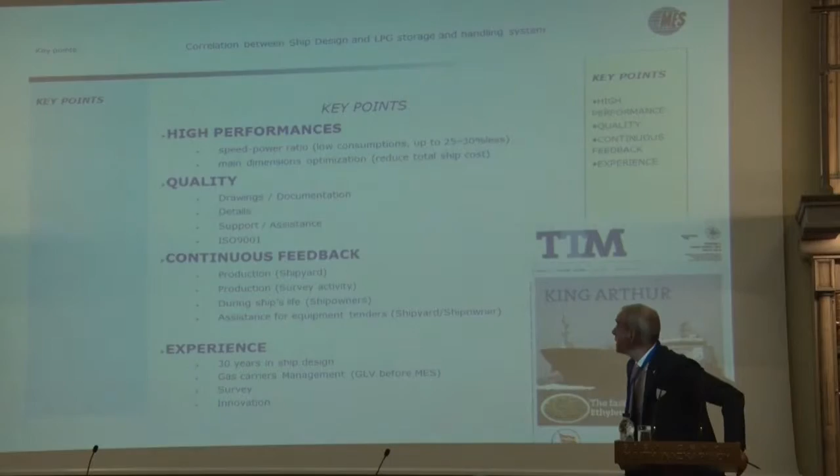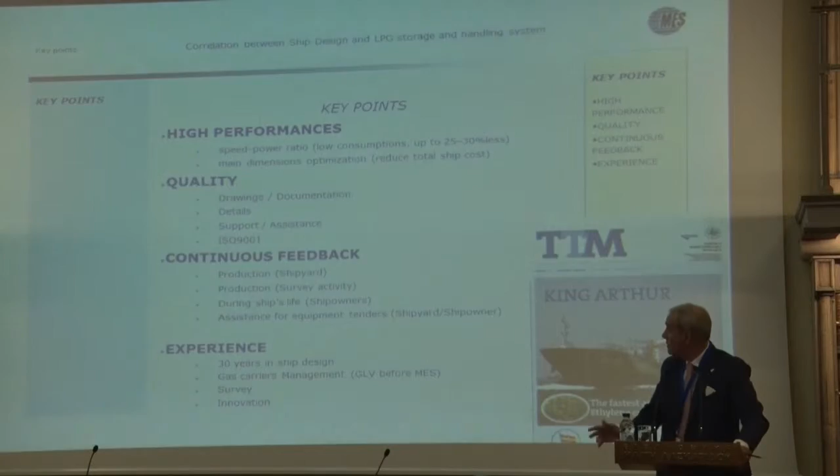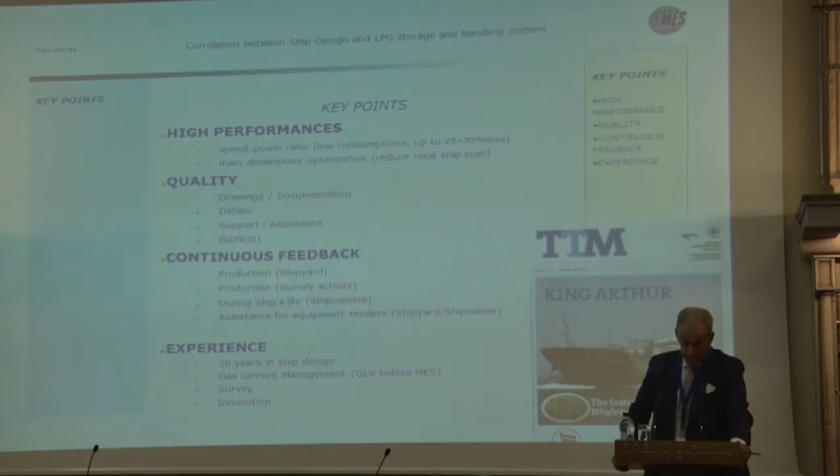Key points: we are very much focused on high performance, and we work very hard on the lines. We will see then how we do. The quality, and we can base our work on continuous feedback from either shipyards, our site team, and also from ship owners, our clients.

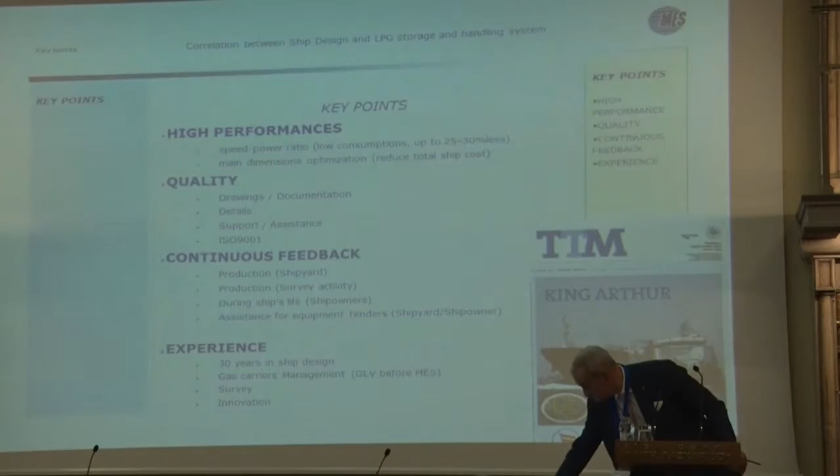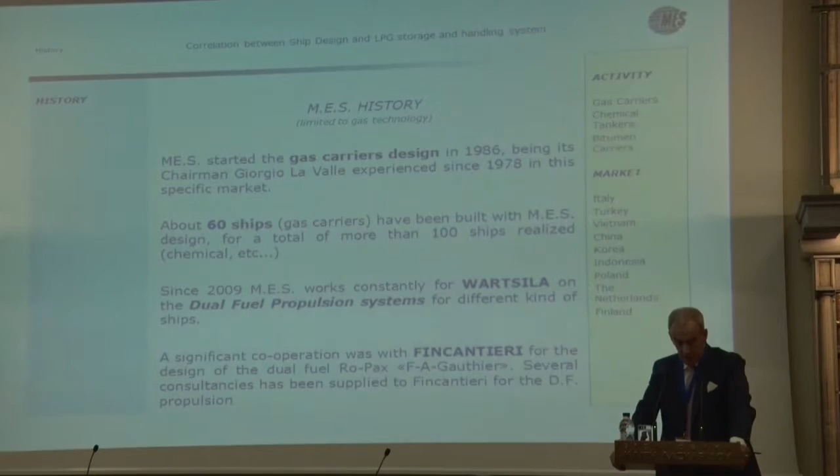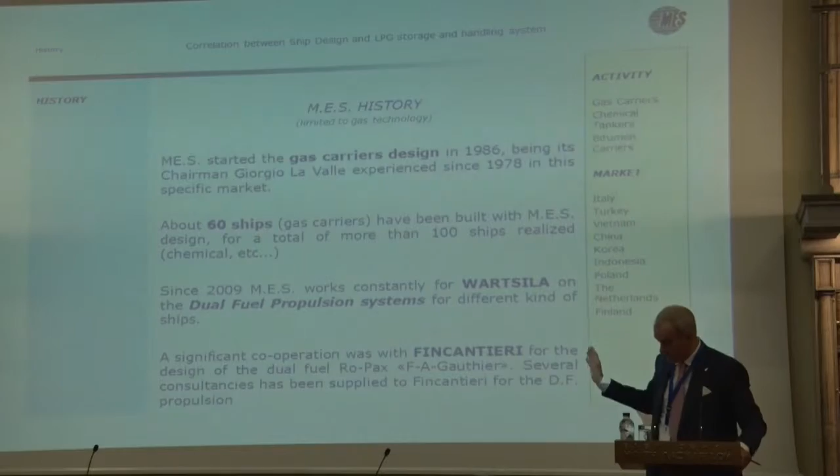We have about 100 ships sailing that we have designed. Out of them, 60 are gas carriers. We are also subcontractor of Wärtsilä for some projects in LNG at the moment.

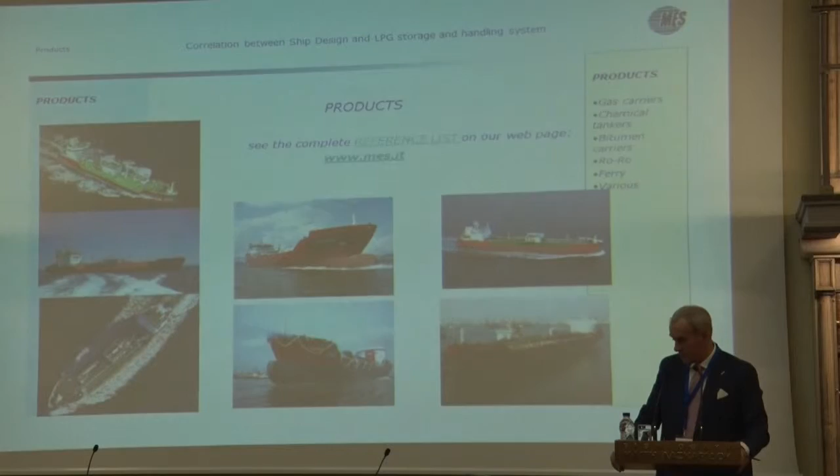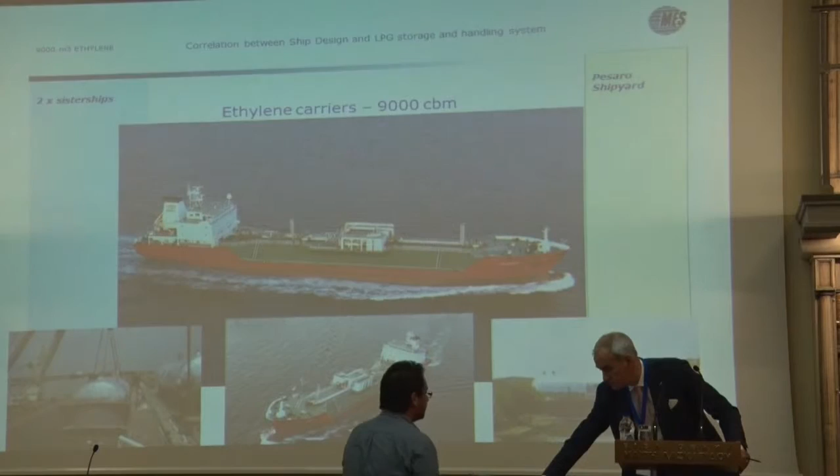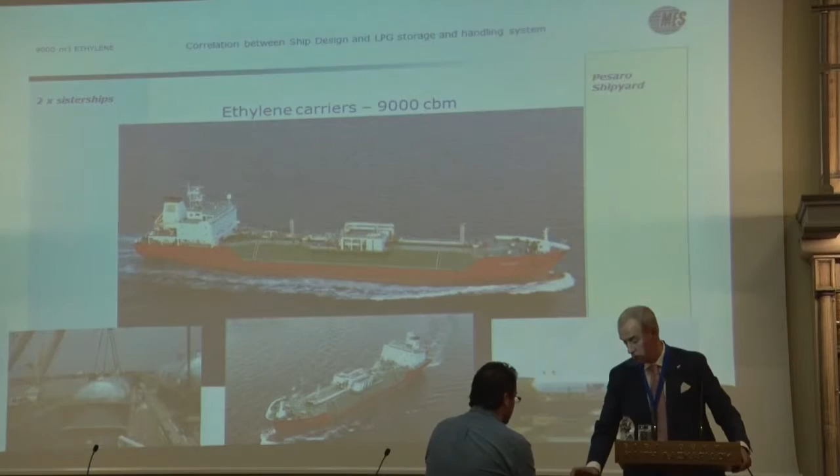This is some examples of our design, ships from 3,000 up to 40,000 cubic meters. This is a series of 9,000 cubic meter ethylene carriers we built, two in Italy, one in Poland, and one in Turkey, with cylindrical tanks.

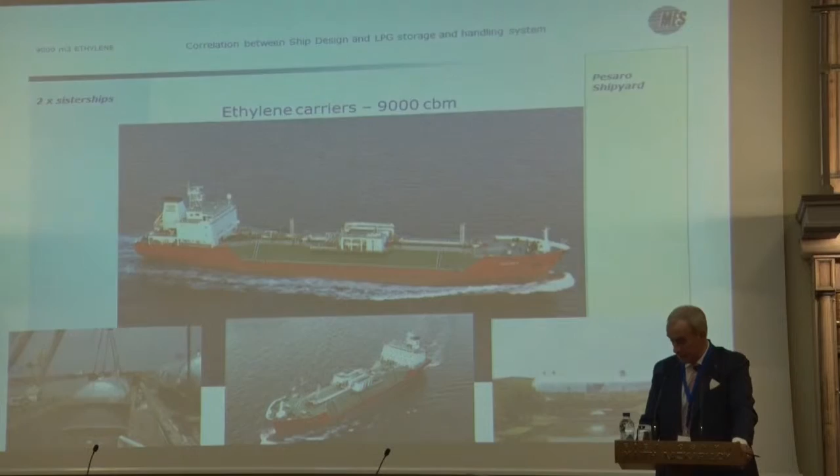The last one is a very interesting project with the twin screw, twin skeg solution. We obtained really very, very good performance with this vessel, just slightly less than a single propeller. That is really very good results.

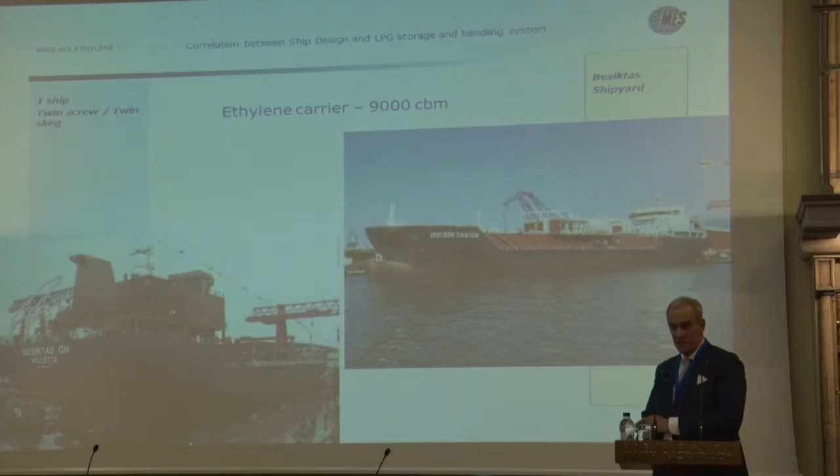Taking into consideration that we have redundancy here and also flexibility - not with this ship but with a chemical carrier - because of the very poor time charter, very poor market, the ship owner decided to run with just one propeller. Some days with one, and some days with the other one.

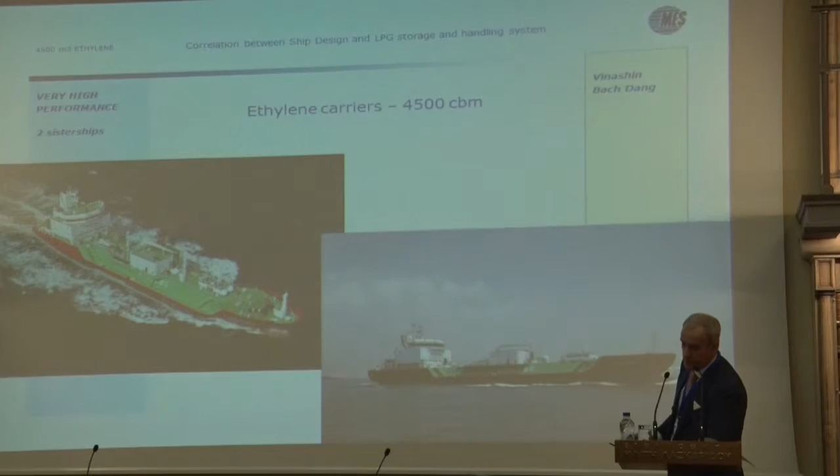This is a series of ethylene carriers, 4,500, we built in Vietnam, with a very high speed, 15.8 knots. That was a ship owner request. These are some details of the same ship.

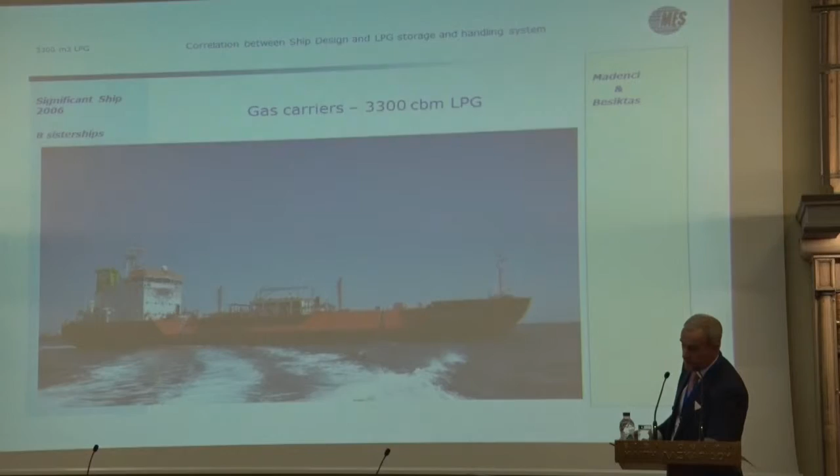Also a series of 8 ships, 3,300, built in Turkey, also very performant. Example of that layout.

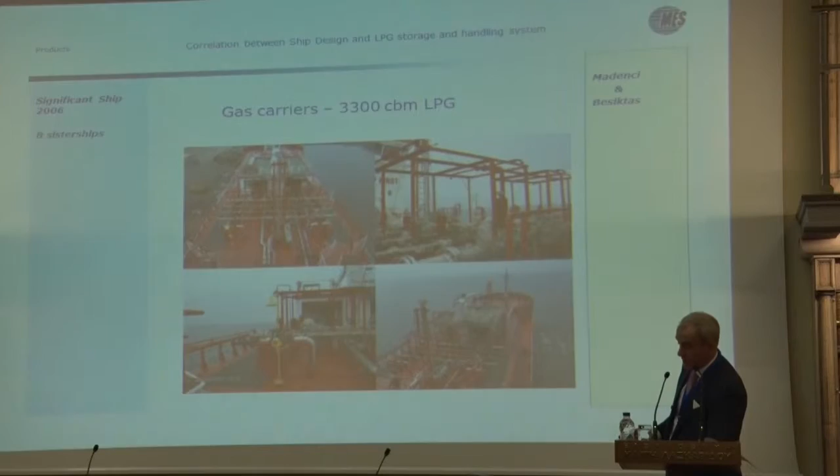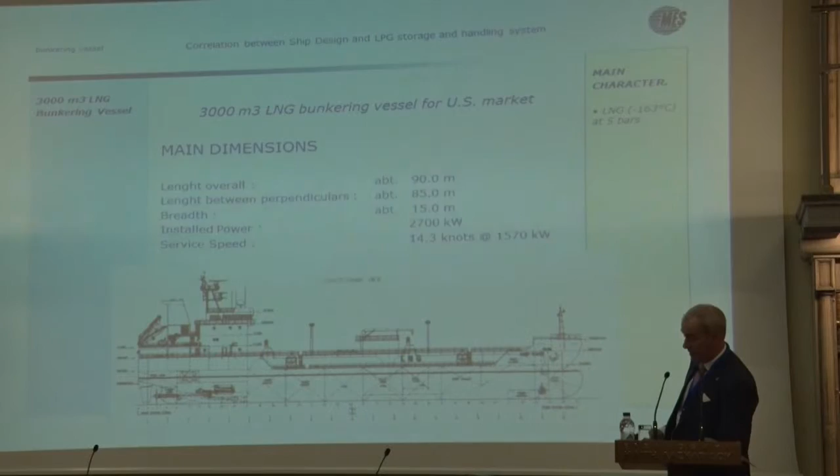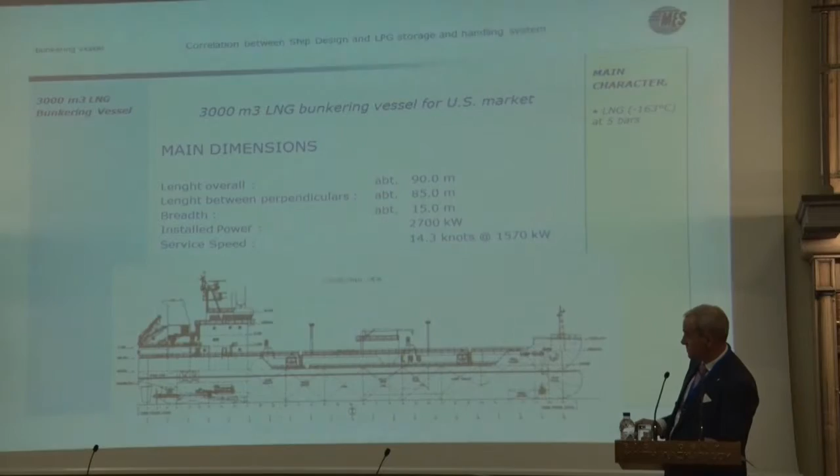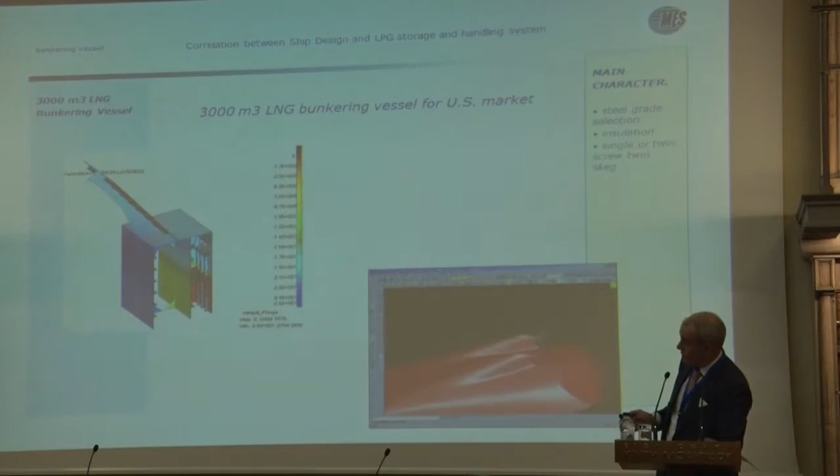Also in the last years we are active in LNG small-scale carriers and also LNG propulsion. We are cooperating with major players, of course not doing anything ourselves, just as subcontractors. Example of FEM thermal calculation to determine the temperature around the hull and therefore the steel grades necessary.

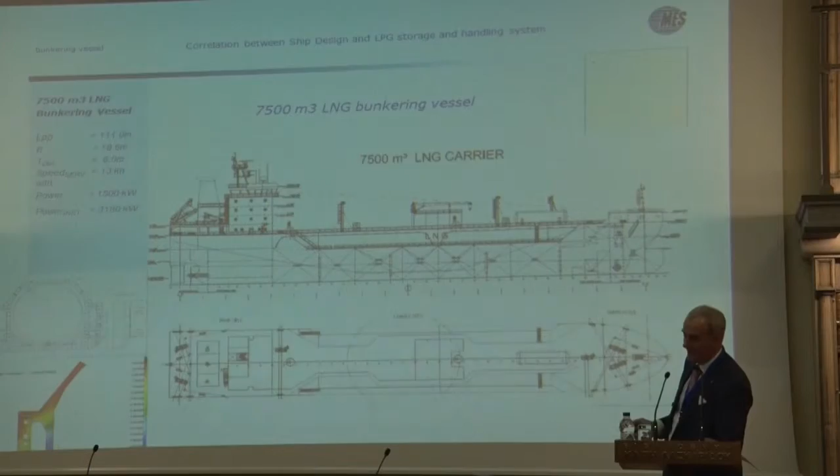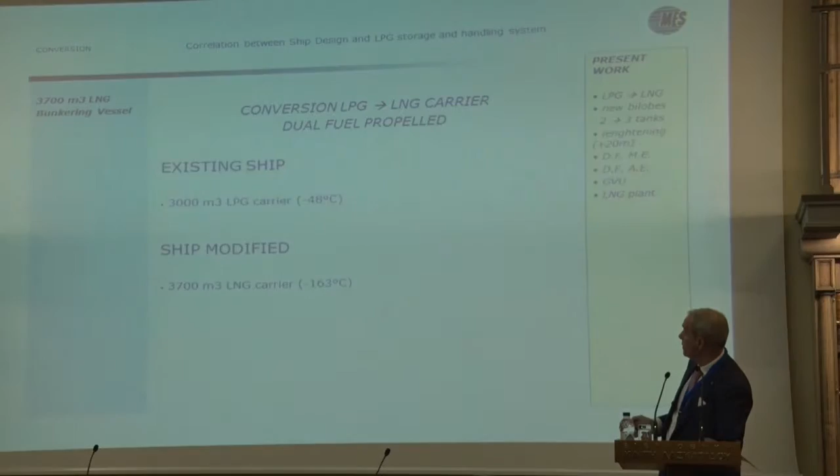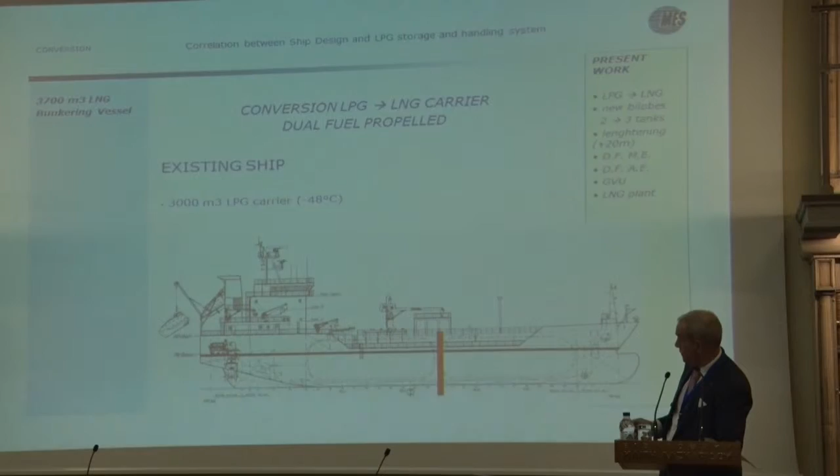Okay, this is also a very interesting job - a conversion. We start from a 3,000 LPG vessel, convert into 3,700 LNG. The work is expected to start end of this year.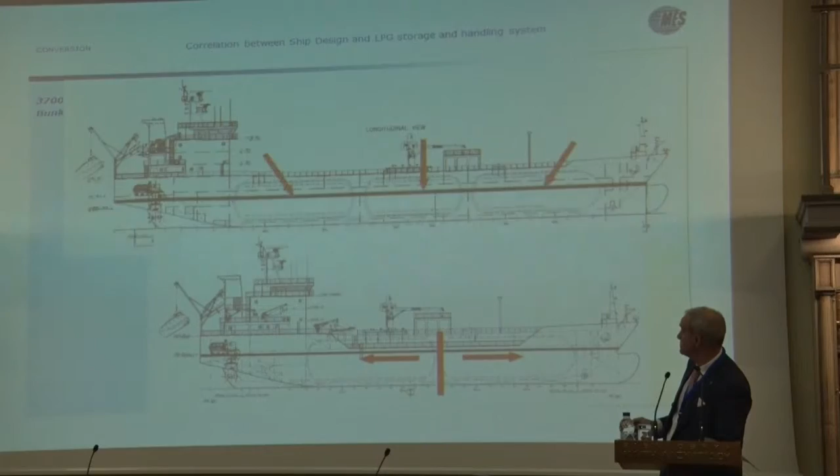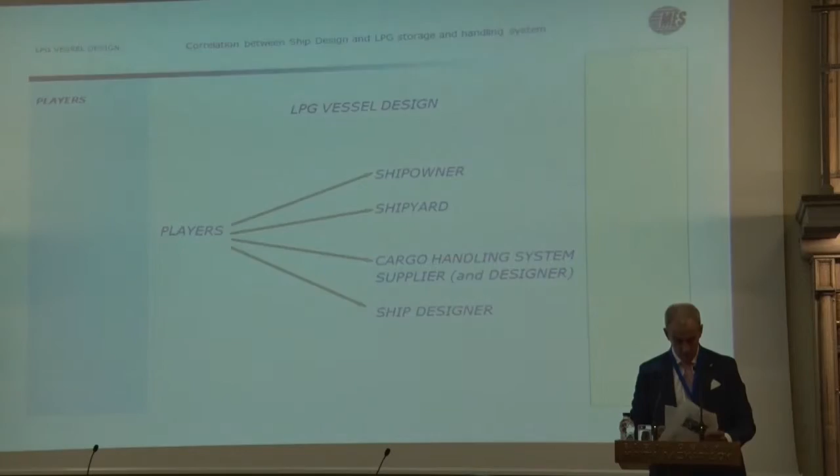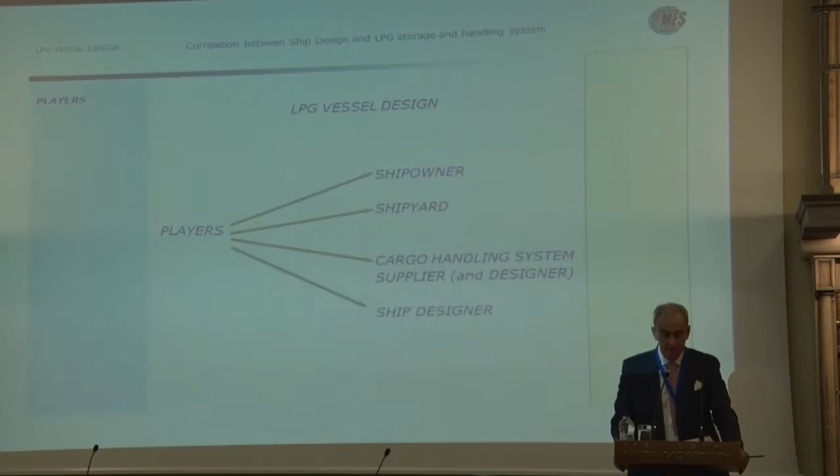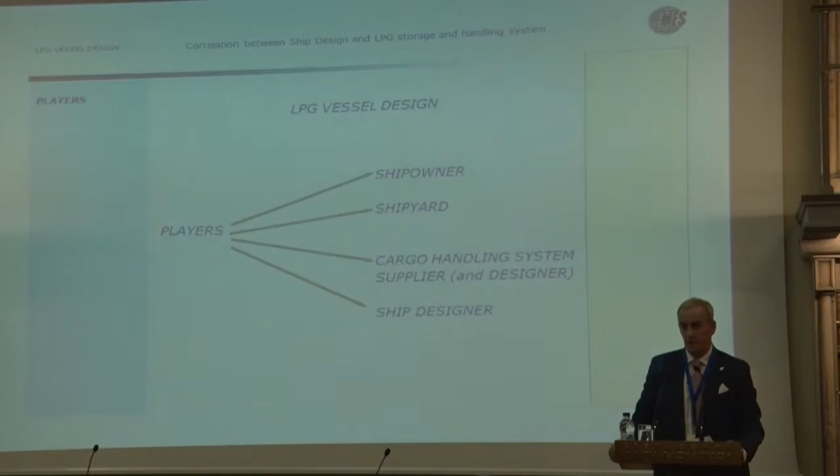Okay, other example of spatial calculations. Okay, now the subject of this conference for me is that I would like to analyze the concept of LPG carriers from the point of view of a small independent designer. Of course, the topics of this vessel are the cargo containment system and cargo handling system. Anyway, also the marine part maintains its big importance.

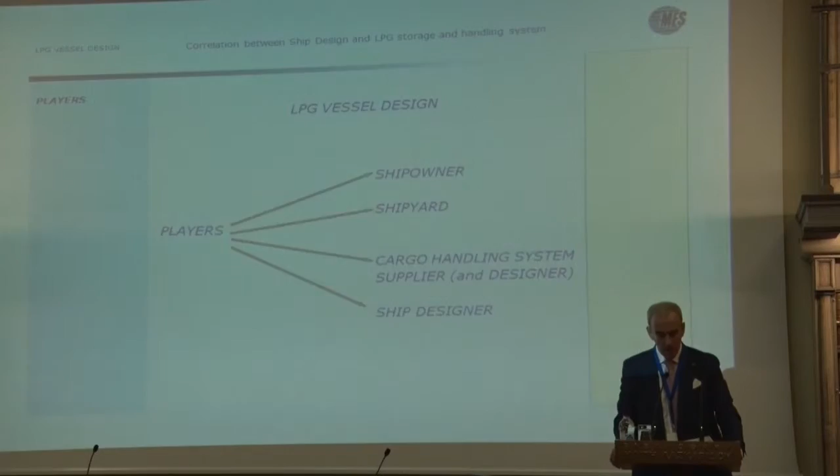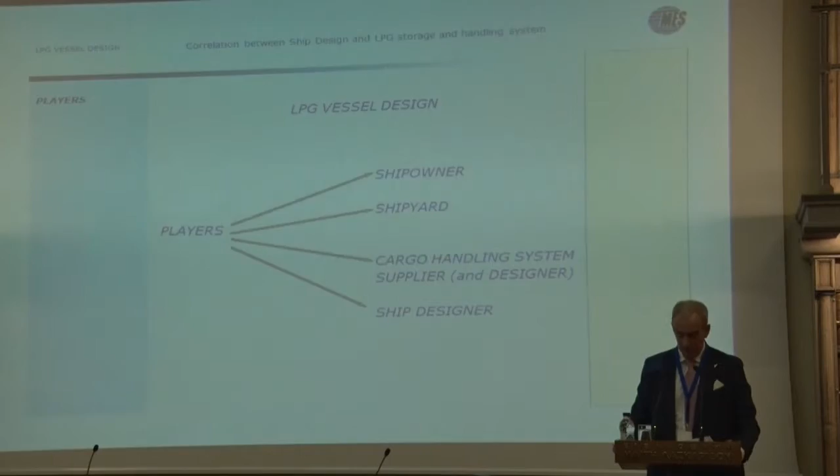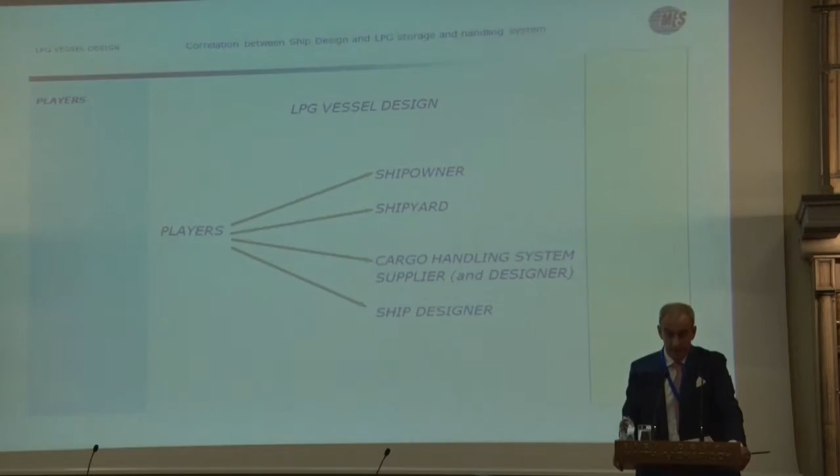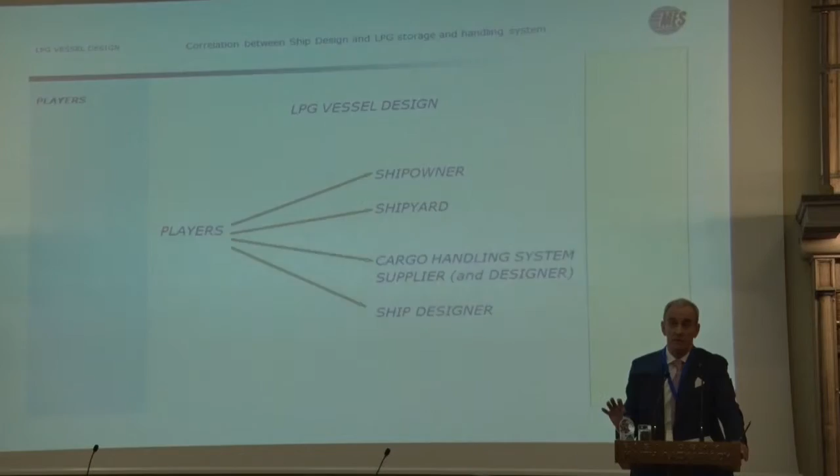When we have to design a ship, we have to approach different players: ship owner, shipyard, cargo containment and handling system supplier. We have to mediate in order to obtain the best optimization of the full ship. The concept is not that we need to have the best of the best containment system, for example, and not the best ship. We have to find a compromise between the ship and the containment system.

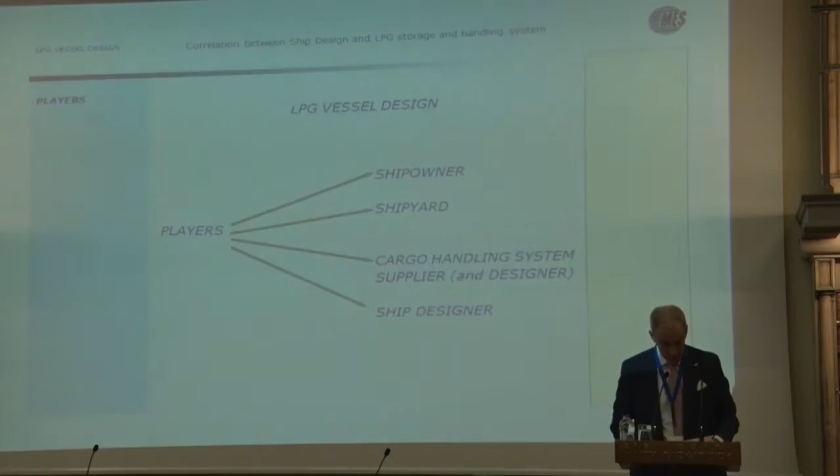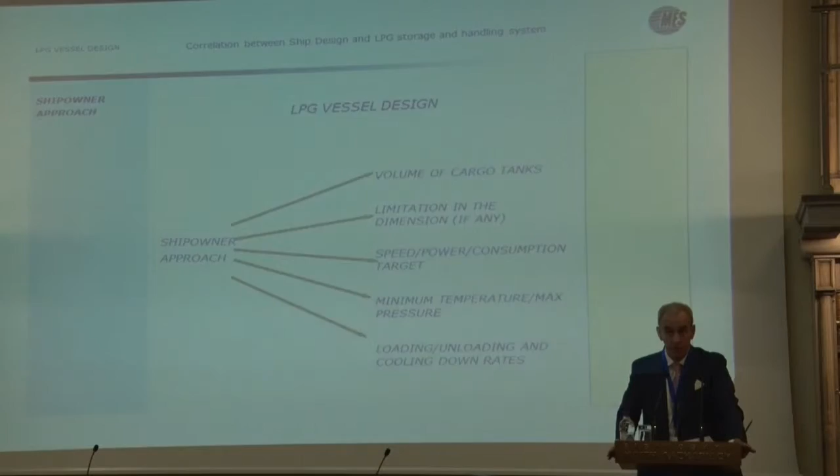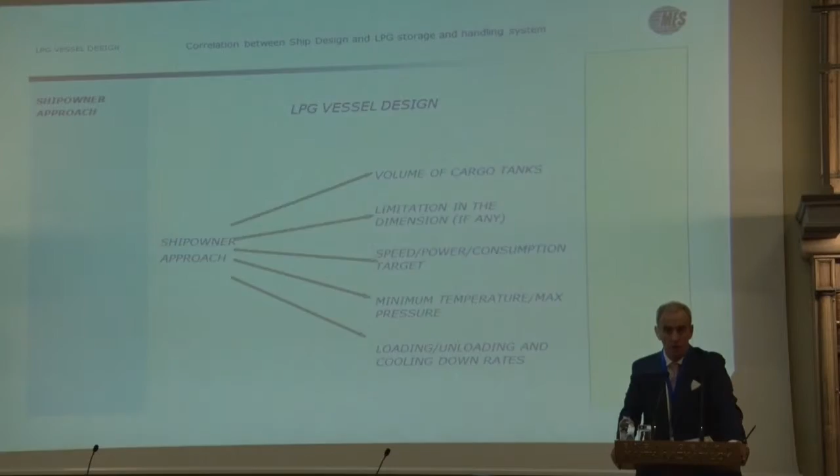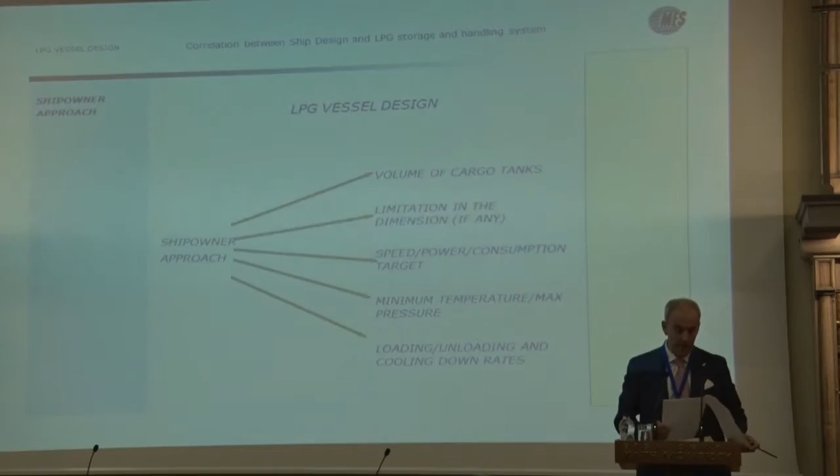Then there is the ship owner approach. Most of the ship owners in this market have a long tradition, and therefore they have a consolidated experience. They know exactly what they want and what they need, sometimes also in a very detailed way. The shipowner staff normally issue an outline specification where they specify in detail if they have, for example, limitations in the ship dimensions, the speed, the cargo tank capacity, the characteristics and the performances of the cargo system, the volume of the cargo tanks, and so on.

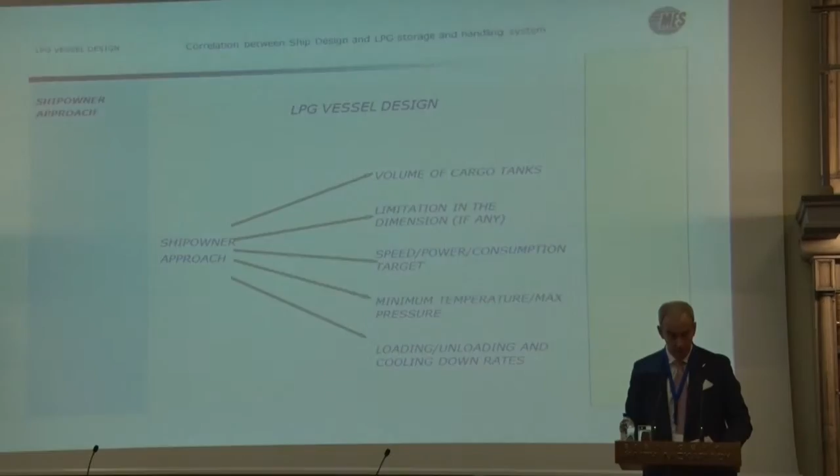The shipyard approach instead is when they appoint an external independent designer, as we are, and this is the case in China, in Turkey, in Italy. We have to provide a detailed specification with all the details of the ship, and of course we have to assure the full adherence to the contractual terms, but we have to optimize the weight, steel weight, and the best reduction of the cost of the construction and of the equipment. So this is our challenge.

The first days of the design are the most important days. It is a win-win or lose-lose time. We have to use our experience, our database, and find the optimum compromise among all the factors that I mentioned before. What is very important is to find the best ship lines, hull lines, and the geometry of the cargo tanks. I understand I have to speed up, so

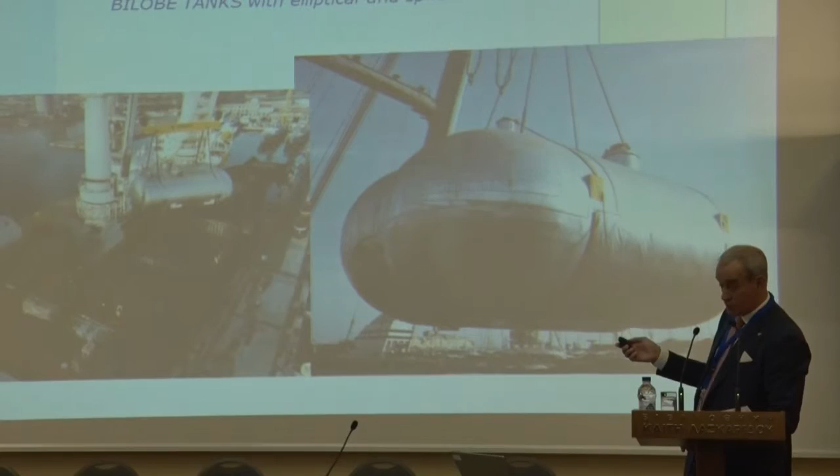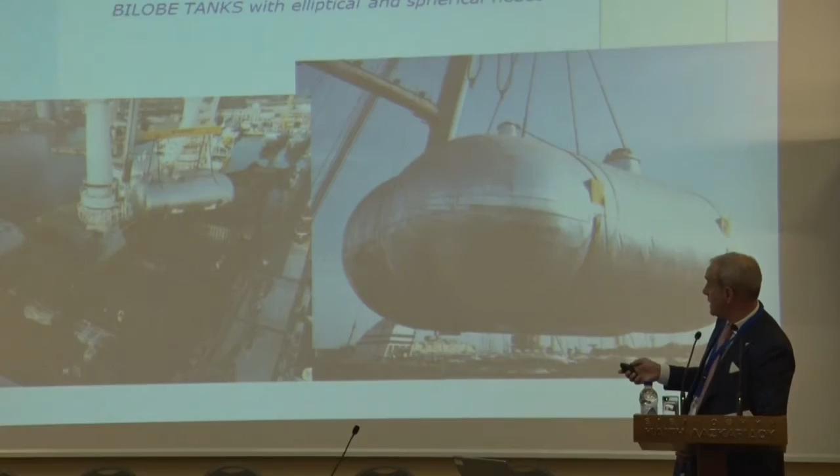just to make an example, we have several chances to have cylindrical tanks with elliptical heads, with tapered heads. We have the possibility to use twin-lobe tanks. Mainly when we have limitations in the ship length, we have to use this kind of tanks, bilobe, either with elliptical or spherical heads, depending on the situation. Okay, I just accelerate.

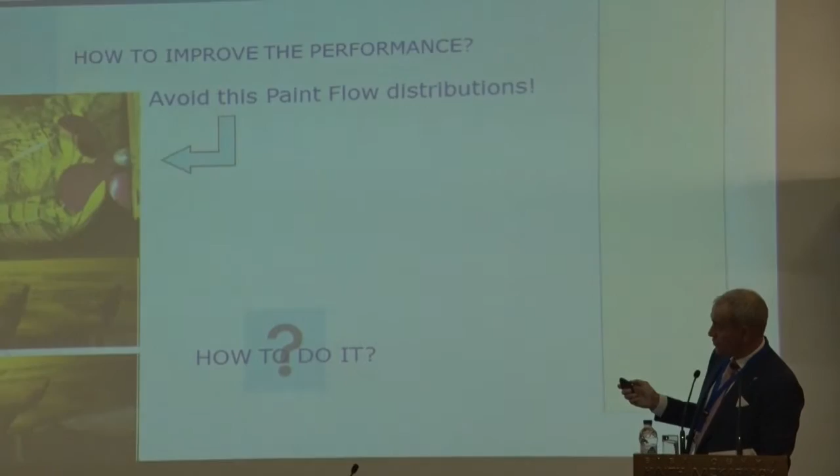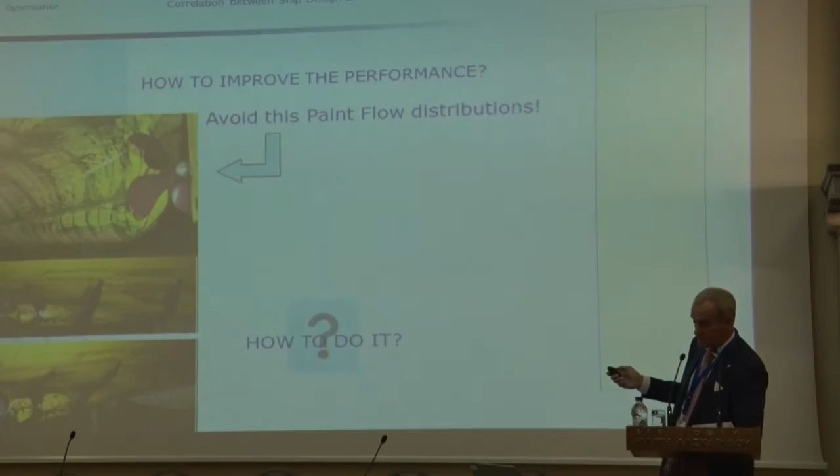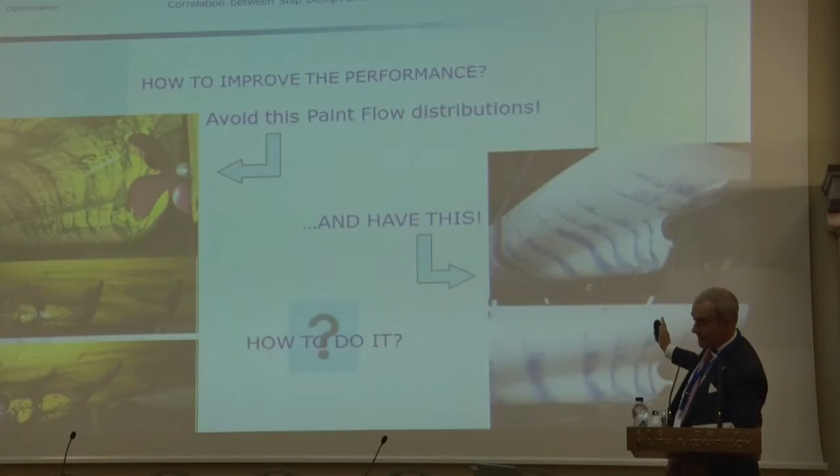This is what we must not do: to have wrong lines, as you can see here, it's not our design, of course, with a very bad flow pattern that gives problems on the propeller efficiency, on the vibrations, etc. But to find the way to have the best possible flow pattern. And when we do that, as you can see, these are practical examples of gas carriers. We can have a very, very good wave pattern. This is not a joke.

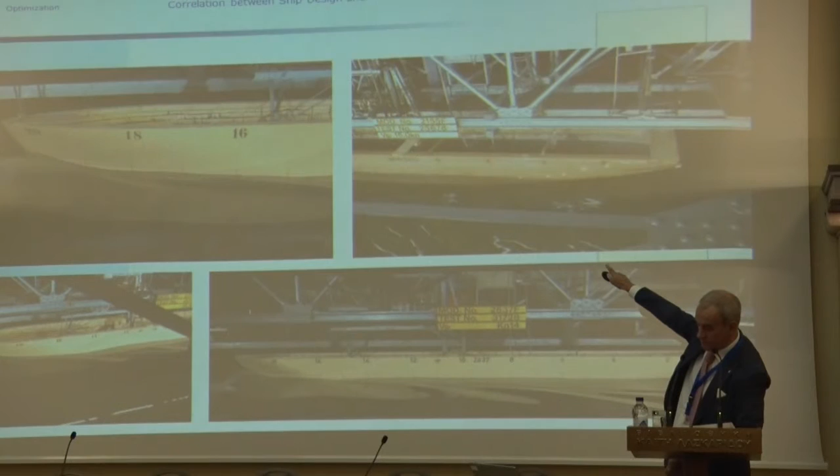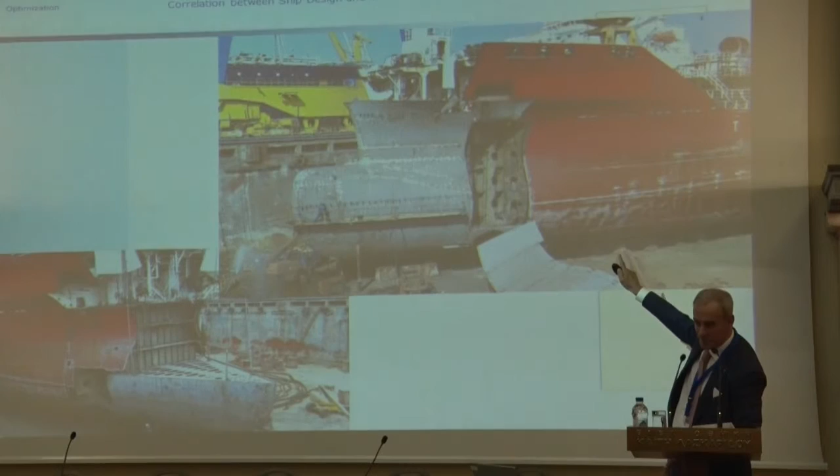You can see this is a high speed for small ships of 100, 110 meters, and the wave pattern is practically perfect. To avoid what sometimes is necessary if the ship design is wrong, since bad performance nowadays is not acceptable anymore, we have also done this, to cut, not our ship, of course, I cancelled the name because I don't want to offend anybody, but we have to do also this one. Is it okay? Thank you very much.

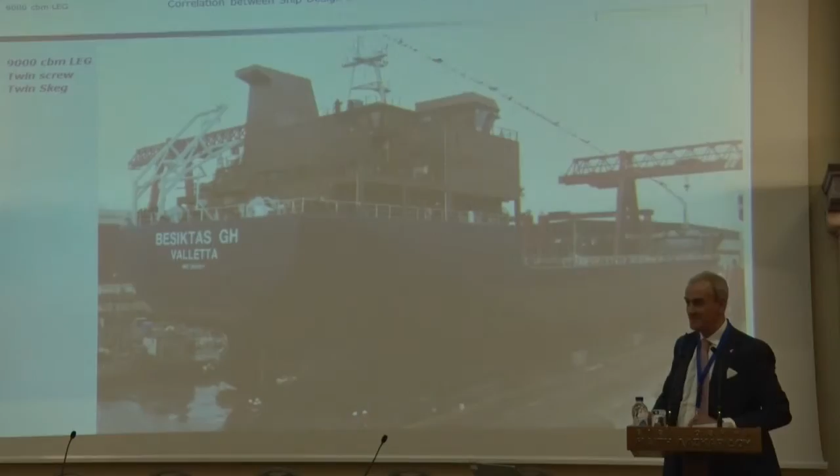Thank you very much for this nice presentation. Do we have any questions from the floor also? Okay, then I'll take the cards and ask one question myself. You mentioned your experience on Type C tanks, the cylindrical types. You also mentioned the bi-lobe tanks. There have been some initiatives about tri-lobe tanks. Do you have a view to offer on this one?

Well, this is a very old story. I remember in the 80s that somebody also designed and studied multi-lobe, not only three-lobe, but multi-lobe, I mean, in the horizontal way and also in the vertical way. Of course it is possible, the technology is there. If in a particular project it is necessary, it's possible to do. You have the capacity to... Yes. Okay. Thank you very much. Thank you.